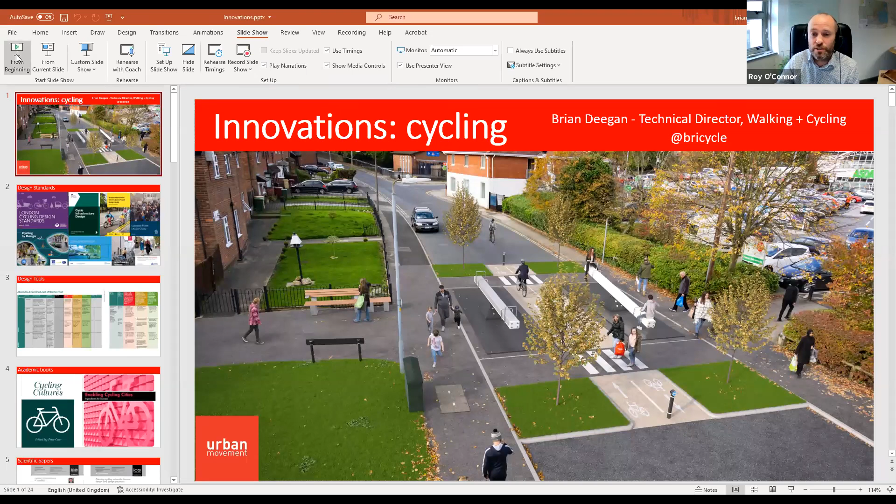Brian is one of the UK's leading street design engineers and was the co-author of the London Cycling Design Standards. He has a background in engineering, and he's also led high-profile policy and planning projects. He's helped develop Transport for London's Healthy Streets Check, a key tool in designing for healthy streets. He's helped ensure the design quality of all projects associated with the London Mayor's £1 billion Cycle and Healthy Streets programme was delivered. As a design engineer for Camden Council, Brian introduced the UK to light segregation for cycling and subsequently assisted TfL in testing innovative approaches to cycle-friendly signalised junction design, such as hold the left, two-stage right turns, and early release.

As a street design all-rounder, Brian has experience tackling the many and varied demands placed on complex urban streets and spaces, from design engineering, traffic modelling and network strategies through to conducting research to the highest industry standards. He's helpful and pragmatic and passionate about making better streets, as I've learned over the last couple of days. Brian's a well-known trainer of fellow professionals, and an inspirational public speaker, and he's a design reviewer for Urban Design London. He's published several technical papers on cycle planning and recently led the infrastructure chapter on the draft EU cycling strategy. He was named National Transport Consultant of the Year back in 2006 for his work on the London Cycle Network, and in 2014 his work on the Camden Royal College Street was named Cycling Scheme of the Year, plus many more awards.

But you're very welcome and we're delighted to have you here. No pressure at all in terms of that build-up, but look, fantastic to have you with us, as Finola said, and I'll leave you to it. Off you go. We can hear you, so I think you're all good. We'll speak to you at the end.

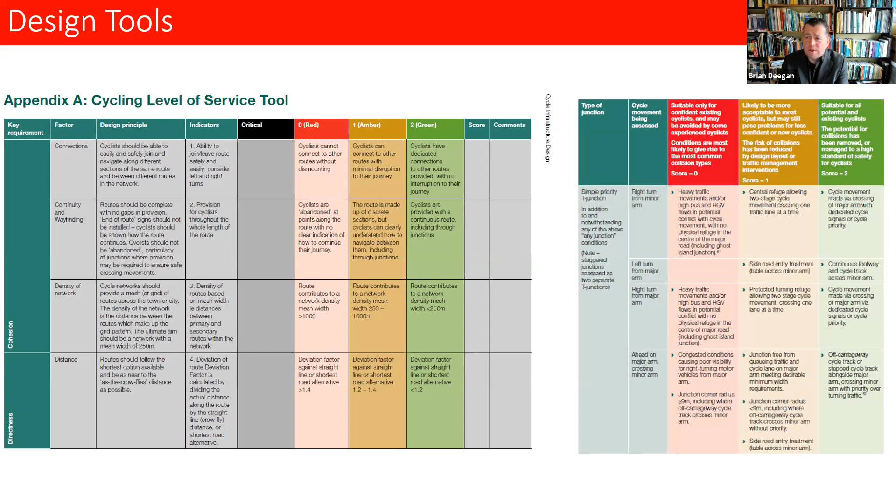So there's a way of quantifying that and getting percentages as well. There's some good ways of taking what we do as engineers, removing some of the mystique, and saying it scores that, and we spent this. I think they're quite useful things to get across, and also act as a bit of a checklist - did I think about that? Did I think about that? The healthy street check, which I'll get to in a minute, is an extension of the cycling one to cover pedestrians as well.

All right, we're going through it. We're going to still keep deep diving my CV, but hopefully we're getting some interesting things out there.

There's a couple of academic style books, particularly the one on the left, the Cycling Cultures one, because I'm a strange engineer in that I've got a master's in engineering, and I work as an engineer. My first degree was actually sociology, so I do a lot of work with the transport - what they call now, the scientists... I've forgotten what they're called. Basically sociologists who do cycling, I've forgotten the name of the group even though I've been a member for 15 years. But there we go.

But this Cycling Cultures one's a good one. There's a chapter in there on wayfinding and the efforts we did in London to find what kind of wayfinding systems work for cyclists. So there's some good stuff in there.

The one on the right there is about the planning system, again from an engineer's perspective. I worked with some Dutch colleagues to say what's different about the UK planning system and the Dutch planning system in terms of how they treat cycling and how integrated it is. So there's some good stuff out there as well.

Hopefully a couple of these things you go, oh, I want to know about that - hopefully there's a few ideas. On the more scientific engineering front, I've done a couple of big papers for the Institution of Civil Engineers, which I'm sure people are members of on this call. I'll just mention the one on the left first.

The cycle infrastructure in London paper was a 10-year study. You never get paid for these things, but you like to get them out to move the profession on. That was 10 years of looking at everything that was built in London over a census period and saying, well, did it get more people cycling? Did it cause more collisions? Those were the two big ones we looked at. As I was putting that together and measuring this across all 33 boroughs of London, a couple of interesting things came out.

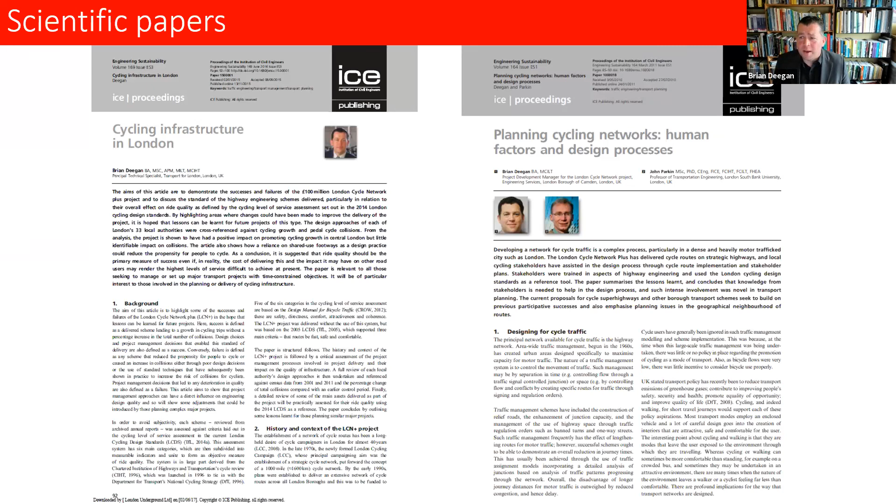We went from having 2 or 3 million a year budgets to 40, 50 million just by generating all this goodwill. So there's two landmark reports, and I'm presently writing a book for the ICE as well, so there's one to watch out for.

Anyway, we'll keep going. Maybe you're doing an economic strategy. Someone in Ireland's done a great job on this. If you're spending £1 million a week on the plan for active travel, you don't really need me to tell you the justification because someone's already done it.

But the EU cycling strategy was mentioned—always good to refer to that for those definitive figures sweated over by some very serious economic people. There's the Greater Manchester regional one, and the London one as well that we did the business case for, which helped draw down £1 billion. So there are some good papers out there if you're looking to make an economic case.

We're all getting up to speed now, aren't we? Yeah, of course we are.

On the technical guides, I'm going to talk later about CYCLOPS junctions, and I can't really do it justice in a couple of minutes where I'll mention it as an innovation, but there's a technical note we put out on that way of aping the Dutch in a slightly more UK style, which you might find appropriate, or might not. It's in some of the Irish guides now as well, so quite excited about that.

And this has been mentioned as well, so I'll sheepishly mention it again: the healthy street check for designers, where you've got cycling and pedestrian stuff assessed at the same time together, so you're not robbing Peter to pay Paul. We want space from cars—repeat after me, that's the space we want.

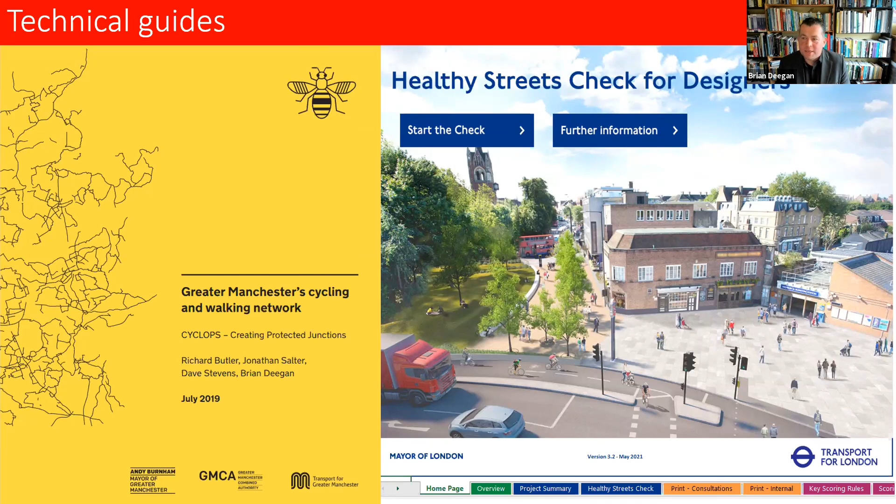You don't want to halve a footway to get a cycle track in there. I'm not saying anybody here would do this, but I've seen people think, well, we can't do that, we've got to have 4 lanes for cars—that's a given, the cars are fixed. Now what can we do with this 3 meter bit of space and this tiny bit of verge? If you assess the two at the same time, it forces you to make the big decisions about reallocating road space. So quite proud of that one, and well worth looking at.

Just like every topic, we're going there: road safety, and road safety policy. There's a couple of really good papers that aren't nearly read enough that I did with the European Transport Safety Council.

It's always good to benchmark yourself across Europe. Last time I was in Ireland was at the Velo-city, and lots of European colleagues coming over going, oh, the stuff's rubbish, why are you doing this, why are you doing that. It's worthwhile putting yourself in that perspective, because it can often drive those in politics and power to go, well, why are we behind?

Certainly a lot of the innovation I did in London was a result of campaigners saying we want to go Dutch, and the mayor saying, what does that mean? And they're going, well, here's what we do, here's what the Dutch do, here's how we quantify it, and this is how far off we are. And they're like, right, be as good as them.

Millions and billions later, yeah, you're still trying to catch up. But these benchmarking projects really help with that.

We're nearly through the whole CV thing, but again, I write these documents for a reason. The big one on the left there I wrote with the London Cycling Campaign, which was interesting, working with a campaign group. We did it to try and influence the Mayor of London's approach towards a mayoral election, on how to decarbonise transport and what the main steps should be, based on all the evidence we reviewed. I've certainly always seen cycling as part of that bigger picture.

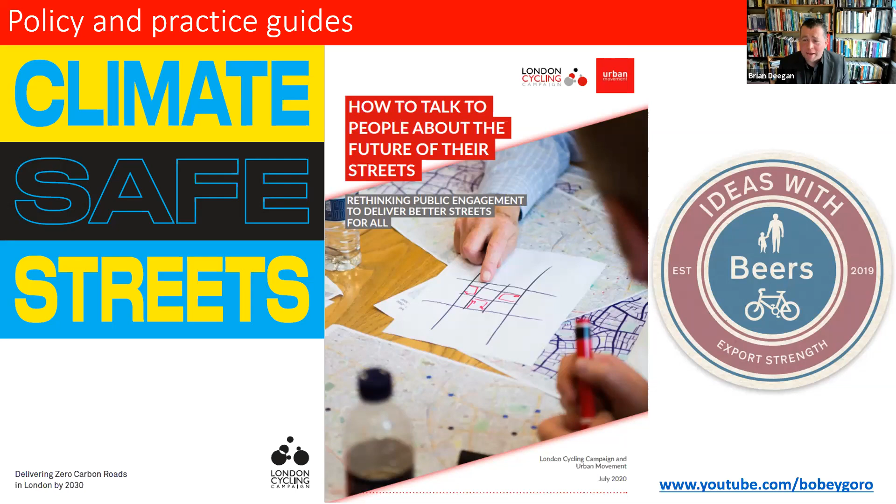Okay, so that's what we've got. Oh, there's a bit more. Oh, I forgot there was this one.

Training manuals as well. I do a lot of training, as we mentioned, a kind of week-long course, and everything I say on that course I painstakingly wrote down. It's all written in the Bee a Champion manual, which I think is well worth looking at. It's in a familiar style, but there's some technical information too, and it helps you get a good overview of what urban designers are going on about, what landscape architects are going on about, what transport planners are going on about. If you're just of the engineering persuasion, you'll never get a scheme built if all you know is engineering.

I think Finola was hinting at this as well: you need to know what everybody else is looking at. What do public health colleagues want? Unless you can talk in all those languages, you'll never really be able to champion a scheme through to actually getting built, particularly if it's a cycling scheme. Strike all that off if you just want to do stuff for cars, the road's wide open to get stuff built there. But when you actually want to change street layouts, you need to be able to talk everybody's language. So that's a little bit of what that document's all about.

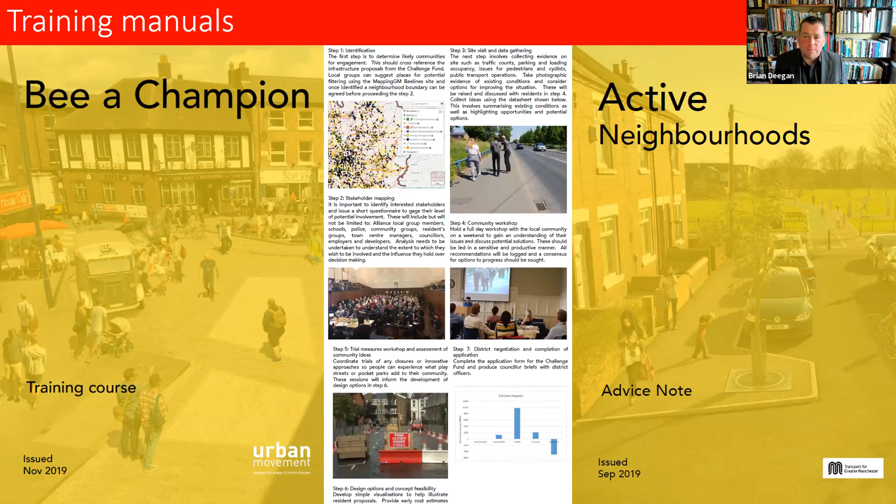Okay, I'm still on intro, but we will get there. Right, we're into innovations now, brand new, hot off the press stuff I'm working with. There's a gentleman in Seattle I've been talking with who does this software called AB Streets.

I was introduced to him by a professor at Leeds Institute of Transport Studies, Professor Robin Lovelace, who did the propensity to cycle tool in this kind of area.

We've been talking about low traffic neighbourhoods, which has been quite controversial. We're making the news, the Daily Mail's up in arms, and people are marching down the street saying we're doing more damage than the Blitz, that it's like North Korea because we've stopped cars going down there.

So we're looking at different ways of approaching the topic, and the cutting edge here is what we're calling the gamification of low traffic neighborhoods. There's an extract on the left, and that map has got a little tool that shows you where all the rat runs are.

You can click on it and say, let's put a closure there. Using the software on the right - I didn't want to show a video or tech demo, but it shows a live representation of where all the cars are going, and you can do it online collaboratively.

You could just give access to the software to a neighborhood and say, tell us where you want to put stuff, agree amongst yourselves, be as collaborative as possible, because when we just drop closures in at the moment, there's a lot of very organized anti-groups coming after us, and it's not pretty. So there's a way of actually involving people and getting them to decide their own future.

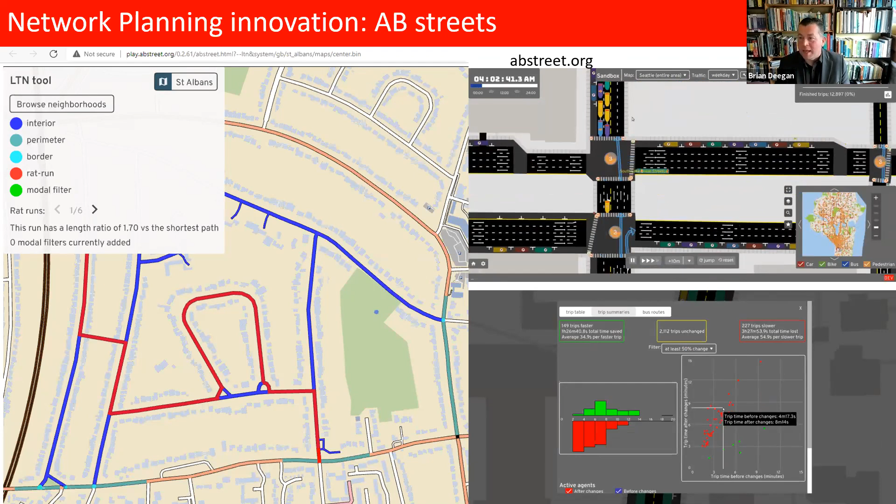It used to be fairly straightforward to do this kind of thing, but it's getting more and more controversial, and I'm hoping you're not having a situation like we're having in the UK or in Ireland.

So anyway, there's a really good tool, watch out for that one. I'm starting to use it in earnest, and there's just some really good techniques. And I'll say it's all open source and free, the AB Street stuff, and the guy running it's a real star.

So yeah, there's obviously different ways of doing this one, but if you're trying to do an assignment model, you're going to have a whole bank of computers running for days, and it's going to cost you hundreds of thousands. I'm not dogging our fellow consultants, but it's quite nice if you put that kind of knowledge and effect in the hands of people and let them decide their own traffic management fate. So that's what we're looking at there.

All right, let's do a few more.

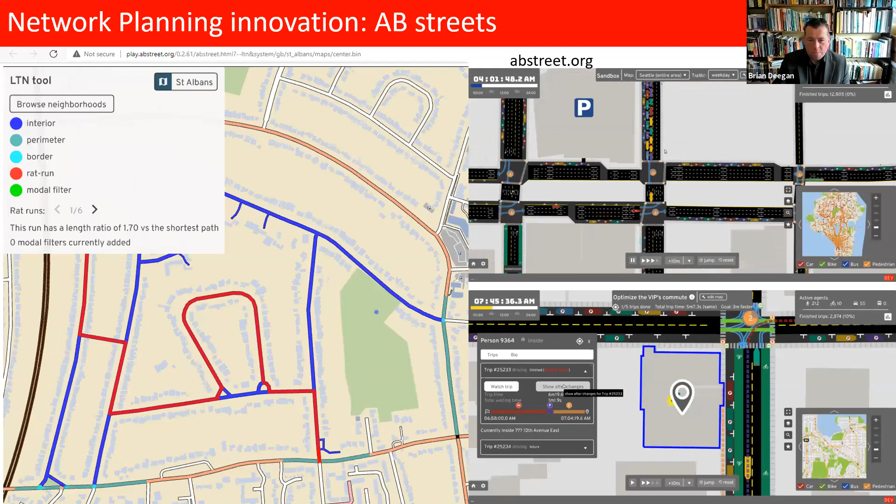I was introduced as the person who kind of pioneered protection, I call it now, rather than segregation, because I've got to acknowledge I was reading Bikeways State of the Art not so long ago, and it's got a whole section on protected bike lanes, which is almost word for word the definition I came up with in the London Cycling Design Standards in 2014, albeit this document's from 1974. So there's nothing really new under the sun.

You're like, oh, what is this new thing? Just placing objects on a cycle lane. It's really not that new. It goes back to pretty much the time when we started doing cycle lanes that were instantly protected. That knowledge just seemed to be forgotten and lost to time.

But anyway, what we've just completed in London is an architectural competition. I was like, look, I'm an engineer, I don't know how to make things aesthetically beautiful. Let's do a big competition for architects to have a go.

It's a combination as well, one that goes with a kind of slotted drain protection thing, which is really exciting. But if you're doing any of these and want a whole bunch of great ideas, I've got all the files, and it's a really interesting project.

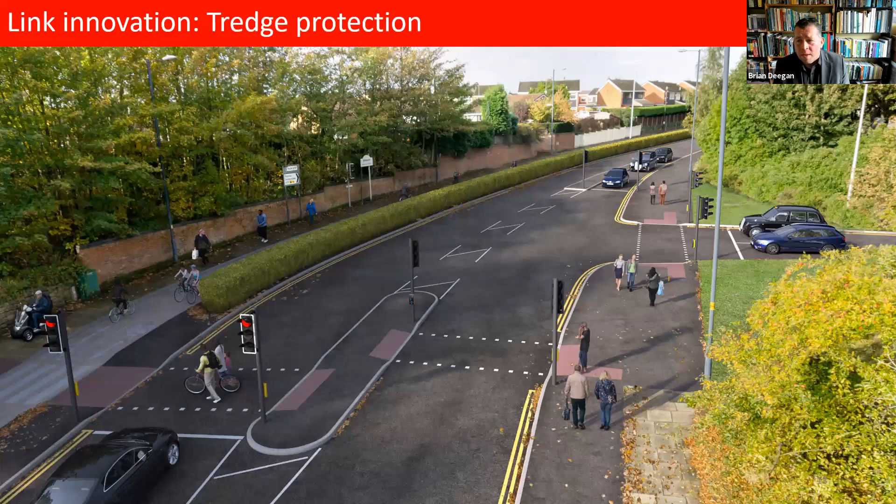Okay, what else is going on? A little bit when it comes to link design. Again, it's one of those things as old as the hills - people have been doing cycle tracks with curb, concrete fill, lovely. But there are all these different, more environmentally friendly ways to do that.

This visualization was using this thing we're calling a Tredge. Lancaster University have been working in Manchester on some key corridors. They did one across a bunch of schools on Princess Road, looking at different combinations of plants. We used to think birch hedges were the best - but actually, are they better in combination with different plant sources? There's a whole bunch of stuff out there.

The main aim is to filter the pollutants coming from the engines of cars - our old friend cars again - and stop that getting to the people on the other side, in this case cyclists and pedestrians. So we're looking at lots of technologies moving on there. It gets caught up in the leaves, rain takes it down into the soil, and if you've got a nice wash away, you can clean it before it gets into the water supply. These are good ways of stopping it actually getting into people's lungs, because air pollution's a massive killer.

We know that - so why can't we, while doing cycling infrastructure, sort out that issue as well? There was a local authority, I'm trying not to mention names, in London perchance, who were trying to give back all their cycling money. They had 30 million to do it, and they were like, we can't defend cycling schemes in terms of air quality - we're going to have to stop this business because we're taking space from cars, so they're getting more congested, going slower, giving off more pollutants. This is terrible for air quality. And this argument's been raging in the UK for a while.

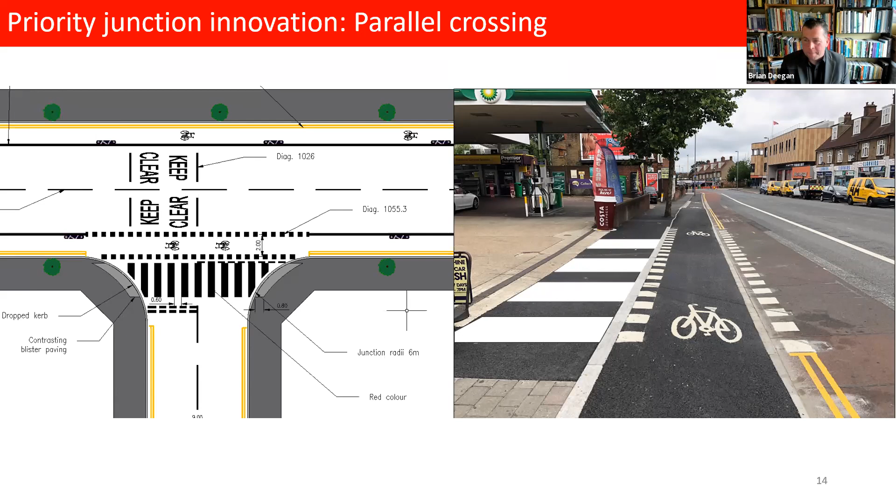So when someone asked, how do we take the cycle track past the side road? Yeah, like that. At the moment, that one on the right has been photoshopped by me because they don't exist in the UK yet. But why not Ireland?

Let's talk about roundabouts just to cover all the bases, although I'm very far from being a roundabout specialist. In fact, I hate them. That's usually because they've got a much higher cycling fatality and incident and collision rate than any other type of infrastructure.

If I'd done this 5 years ago, I'd been going on about the Dutch roundabout and the trials that we did, and you all know about that now. There's been some really interesting attempts at that in Ireland.

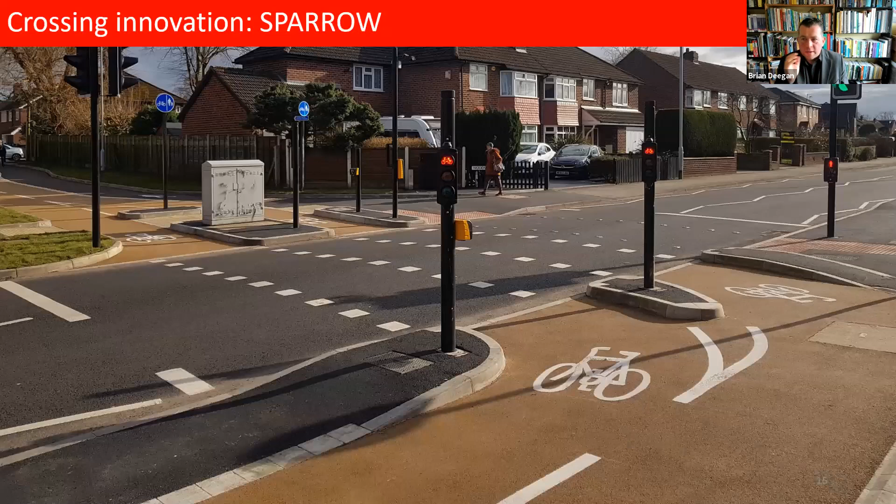Crossings, I'm going to go big on this one, and I know I'm already running out of time, but I'm just going to keep going. Crossings is something I've always been a massive fan of, and I think they're the most important things you can do on a cycling network.

You know, okay, you put in some cycle track and you've taken a nice picture, brilliant. You might do a few of those in your career, maybe 10 miles of that stuff designed up if you're really on fire. But really the day-to-day thing is the crossings, getting across these barrier roads where the cars are dominating, and connecting all the quieter residential streets and the ones that aren't quite as heavily trafficked together. This is your basic network functioning.

I'll tell you how the penny dropped for me, because this might sound blindingly obvious, but it took me a long time to figure it out. When the London Cycle Network was effectively cancelled around 2010, I had to do a paper for all the powers that be on the bits of the network I'd spent 10 years trying to build, the bits I wanted to keep, that were most important.

I was going through, well, is it the bit of cycle track there? Is it that one? And I started thinking, and it ties in with that Cycling Cultures book I showed as well, of how people actually navigate around. And I thought, well, actually, if that crossing by the side of the British Library in Camden on Euston Road went, how would anybody from the north get south? And I started plotting these crossing points, going, yeah, we've got to keep these crossing points.

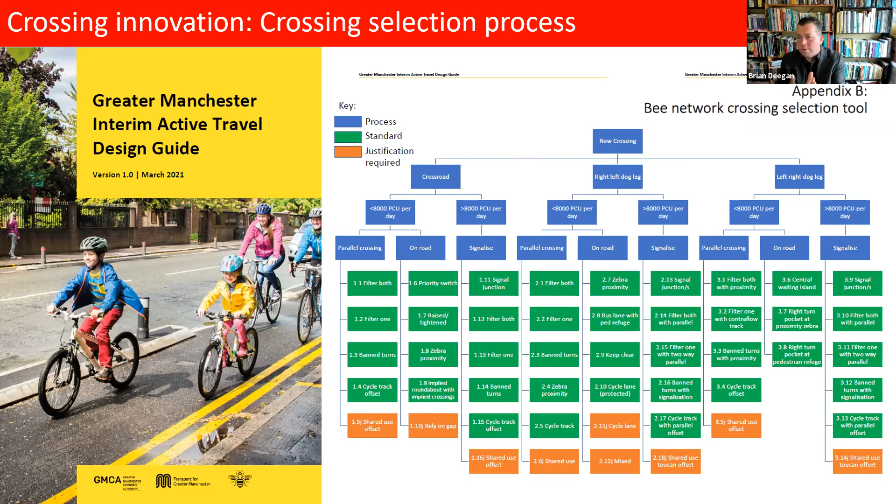I go through and say, well, rule all these things out. Could you have blocked one of the roads and done it straight up? How do you get it separated? And it turns out we come up with 39 different ways of avoiding shared use if you're trying to get a cyclist across the road.

No one's been this extensive, because trust me, I'm somewhat obsessed with crossings and how important they are to the network. So it's worth looking at the interim design guide appendix in Greater Manchester and have a look - there's lots of standard details for our kind of SPARROW ones in there as well. These are kind of little schematic versions.

What I'm trying to say is there's 39 different ways that we know of avoiding shared use. Don't just think, I'm getting a cyclist across the road, I better do a toucan - that's a fail. It's certainly a fail in the policy guidance coming out from the government in the United Kingdom at the moment. So lots of work in that area.

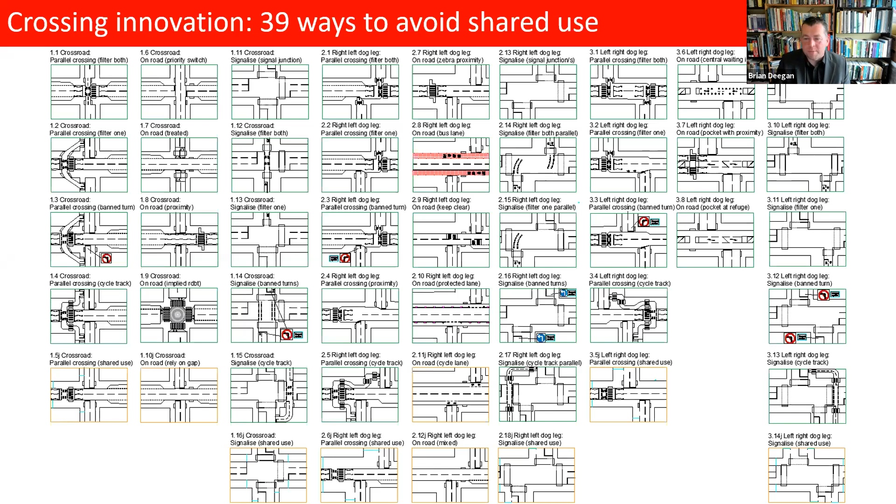And it's very much inspired by the Dutch design practice of separating cyclists in both time and space - space in that they're in separated and segregated cycle routes on the approach, and time in that you're never crossing the junction at a time when another vehicle, a motor vehicle, is turning across your path. So you're kind of conflict-free, going parallel with the pedestrians.

Definitely best practice. We did look at Danish approaches in the UK and tried them, where we're kind of relying on cars giving way. I want to come back to that in a minute with some Irish ones. But it wasn't a huge success for us in the UK, so we're definitely looking more at this Dutch style.

Some Dutch people have been saying, hey, that's not the Dutch style - you should have the cycle lane on the inside. To which we in Manchester say, you're doing it wrong. You're doing it wrong.

If you put the cyclists going around the outside and pedestrians in the middle, you can have diagonal pedestrian crossing, so you can cross a pedestrian on their desire line. Surely that's got to be better.

We also think you can get bigger storage islands for pedestrians when they're waiting. The islands where pedestrians are waiting are quite large, and then they're crossing to another large island, thinking about where the cyclist is going. But they're already in a large space. Whereas when you put the cycle lane on the inside, you get really tiny sliver islands for pedestrians to wait on, so they tend to wait on the footway and then walk across the cycle lane. We think there's more conflict with it.

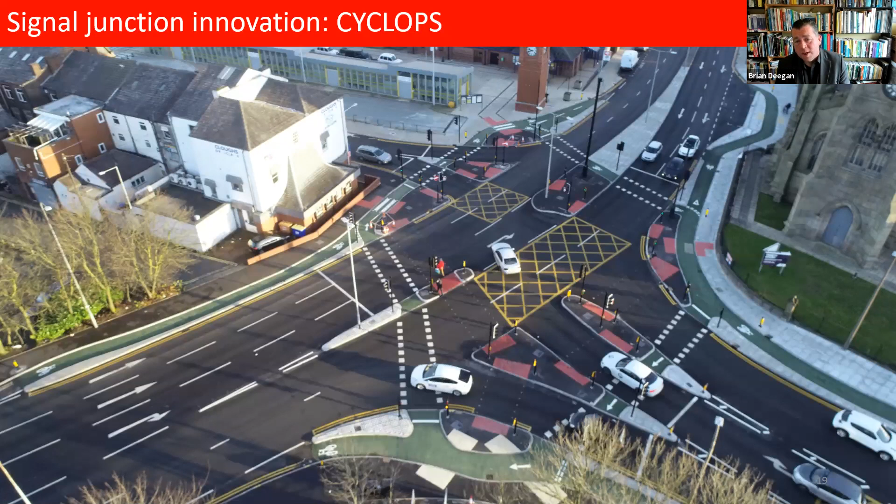All right, let's talk about some Irish innovation. I was invited to come in and look at the signal junction stuff, so I'll get back to that as that's my favorite area to talk about. But interesting stuff I saw in the Dublin Bus Connects document about signal crossings on bus stop bypasses, which is a really interesting way to take it.

In the UK we thought this might be a little bit over-engineering. When we tested bus stop bypasses with the Transport Research Laboratory and brought visually impaired people in to try one we'd built, we asked what they thought. The zebra seemed to work, but what I like about Ireland, and why I think they've been really innovative at the moment, is they're really taking on board issues with visually impaired people, who say they feel a lot more comfortable with a signal crossing. I see that as a design standard. I've not seen this anywhere else in the world, to have a signal crossing in there.

The issue comes, well there's a few issues, but the research question I'll be watching is: will cyclists respect that signal? One of the rules in signal design is if you stop someone at a red light, particularly a cyclist or pedestrian, it should be obvious what the conflict is. Then you go, oh right, I see, they've stopped me because there's a whole rake of cars coming across there. In this case, when that button goes, will it be obvious enough to a cyclist what the conflict is, and will you get good compliance? So I'll be watching to see how these bed in.

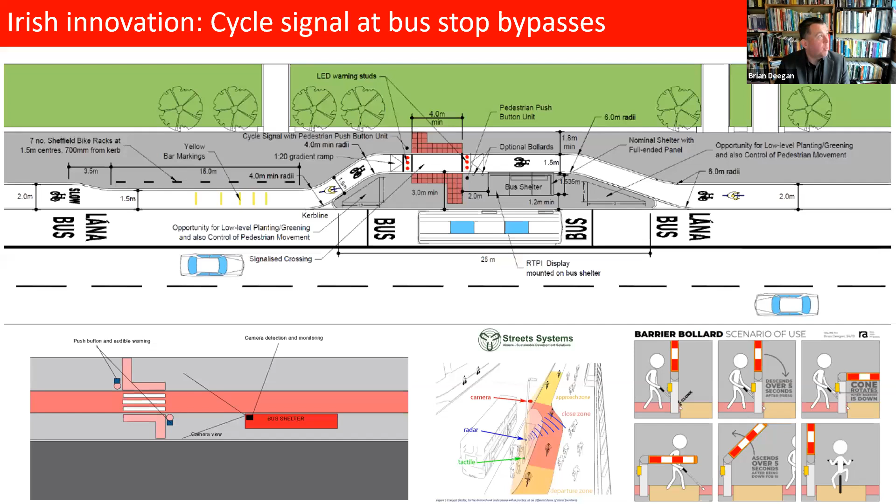So it's really interesting to see what you're doing in Ireland. I'll be watching out for it to see how it behaves. And again, how do you do a bus stop bypass and keep everybody safe? That's the research question I'm hoping we're going to answer. Another couple of things that are really interesting, something I've been trying to push.

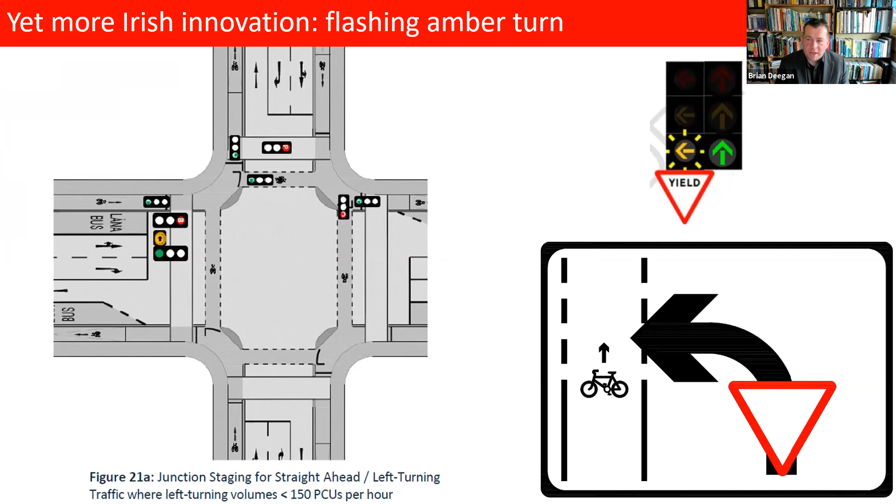Interesting stuff, the flashing light yielding. I wanted to trial in the UK with pedestrians and cyclists going at the same time, and then we get like a massively efficient junction, but it'll be interesting to see how this one beds down. It was on my list of things to check, but everybody got a little bit bored of me testing new stuff in London, so I had to get stuff in Manchester. But I'm really excited to see this being tested in a similar environment to the one we have over here.

So yeah, really, where does all this lead to? In the UK, I'm saying really we need a signalized zebra. We need to be able to put zebras in at signal junctions like we have in the entire rest of the world. And what does that mean? Well, as a traffic engineer, I'm pumping 40% more capacity into a junction.

And we compare the method of control from like a protected junction. I've shown it there in 4 stages to allow the rights, but theoretically that could work in 3 stages: traffic going left-right, traffic going up and down, and then all cyclists, all peds going in that same stage. So you've got that stage, but at stage 3 a little bit of lost time creeps in there, not the most efficient.

The way the rest of the world, and particularly America, have been pushing this one as well, is to let north-south traffic go at the same time as north-south cyclists and pedestrians, and anybody turning yields. So this is the way your flashing amber will come in, and then east-west everybody goes, and anybody turning yields. So 2 stages, no lost time.

It's a traffic engineer's dream, but that's not what you're doing in Ireland. You're kind of doing like, we'll let cyclists go in that one, and it'll be a test. But you still effectively have British style rules that nowhere else in the rest of the world uses. So it might be something you might want to think about.

I've got like a kind of 4-year plan for making this happen in the UK, and that's with a fair wind. But there's nothing stopping the introduction of signalized zebras and really efficient junctions that work for cars and people walking and cycling, and everybody really.

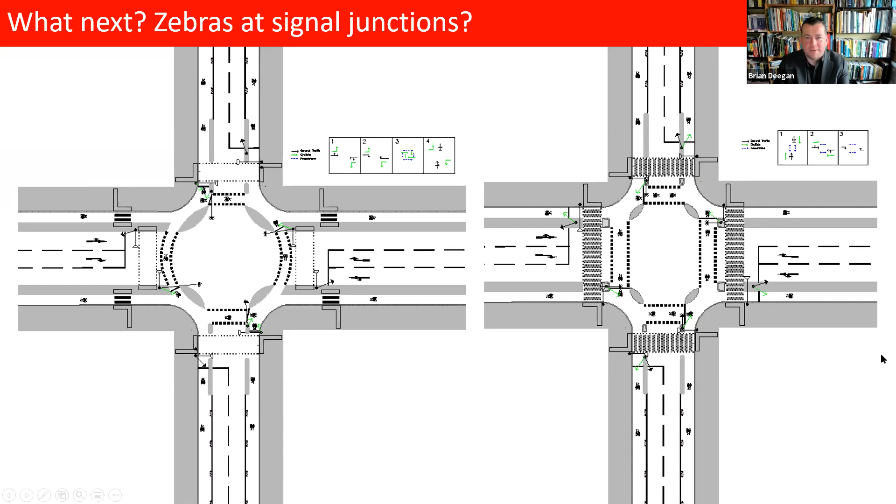That was the last one I had. Yeah, fantastic, Brian.